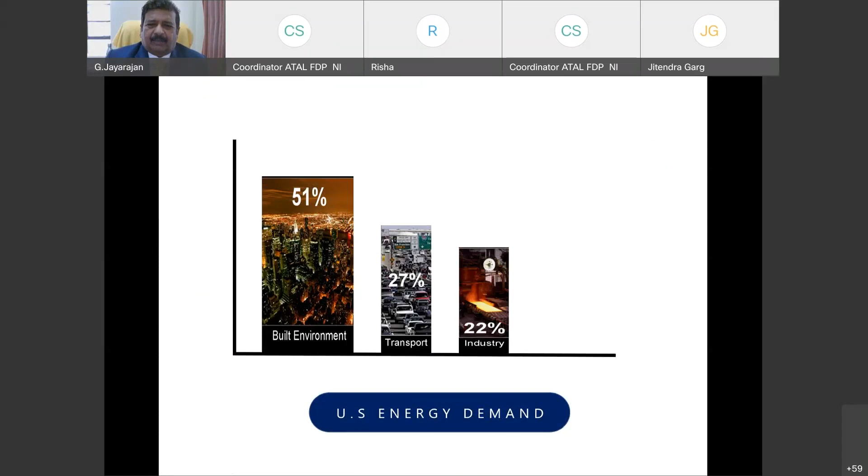Are coming up in the entire world. So the energy demand, the US energy demand, consumes 51% of built environment, and transportation 27%, and industry it's only 22%. Built environment is unavoidable, but we can reduce the consumption because most two-thirds of the life of our human beings are spent in the house only. So we need to curtail the built environment consumption. Then only we can able to reduce the carbon emission.

The problems, what are the problems available? Heat and cool, it is consuming 38%. Food and water 19%. Light 18%. Appliances 13%. Others 12%. These are all the problems we have to curtail.

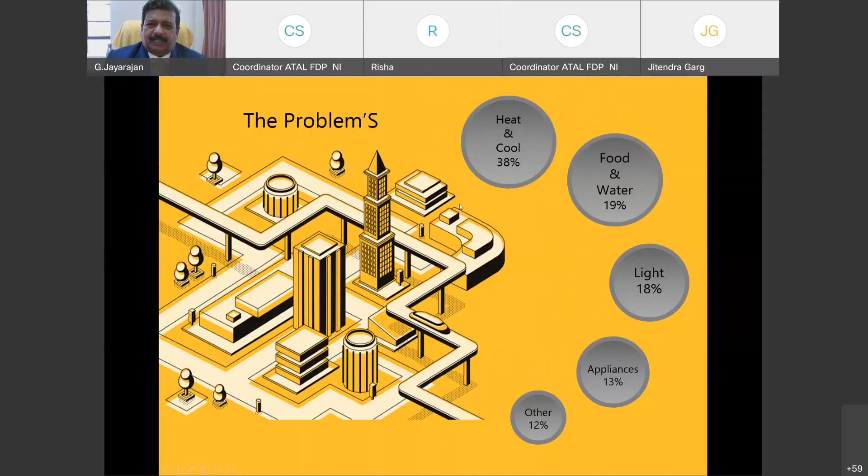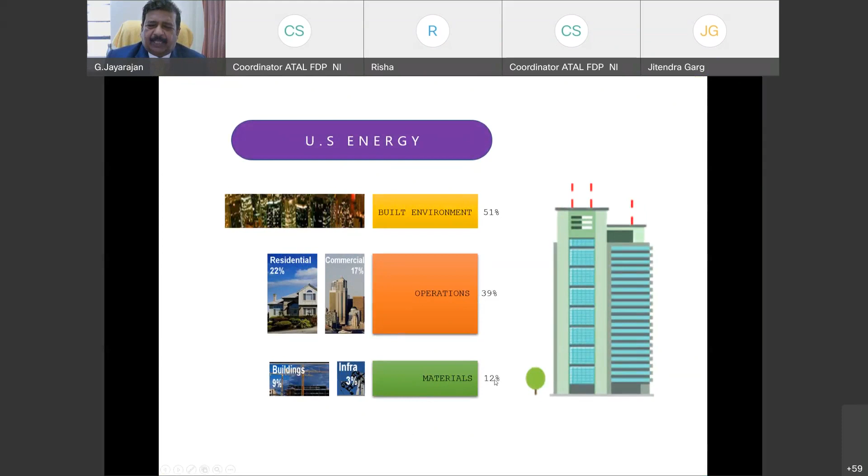US energy built environment 51%, residential 22, commercial 17. Operations also we need energy efficiency, energy required for operation 39%. Materials, for production of materials, we have to incur energy of 12%.

While launching the Green Building, US Green Building Council in November 2007 said the climate change is the single largest opportunity for this country since the mobilization of World War II. It was the slogan at the time for launching the USGBC.

As CO2 increases, what will happen? Billion tons of CO2 emissions, a billion tons per year, is emitted under various conditions. In the previous slides, we have seen the concentration also increases day by day. The red is the worst condition, and the yellow mark is what we can able to tolerate, but we cannot sustain that.

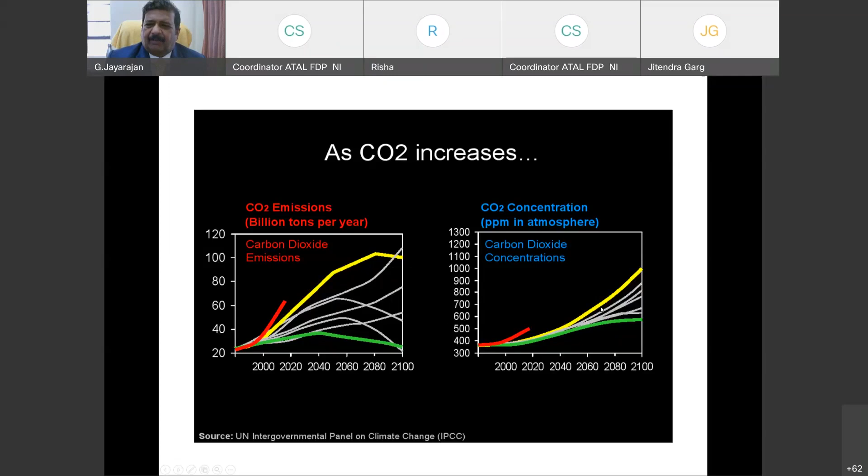Now we are at 385 parts per million. At the rate of 2.5 parts per million annually increasing carbon concentration, what will happen at the end of 2035? We will reach 450 ppm CO2. That will trigger potentially irreversible glacial melt and sea level rise out of humanity's control. It will go out of control if the same carbon emission is continued, increasing at the rate of 2.5 ppm annually. We will be meeting the 450 ppm at the year 2035 itself.

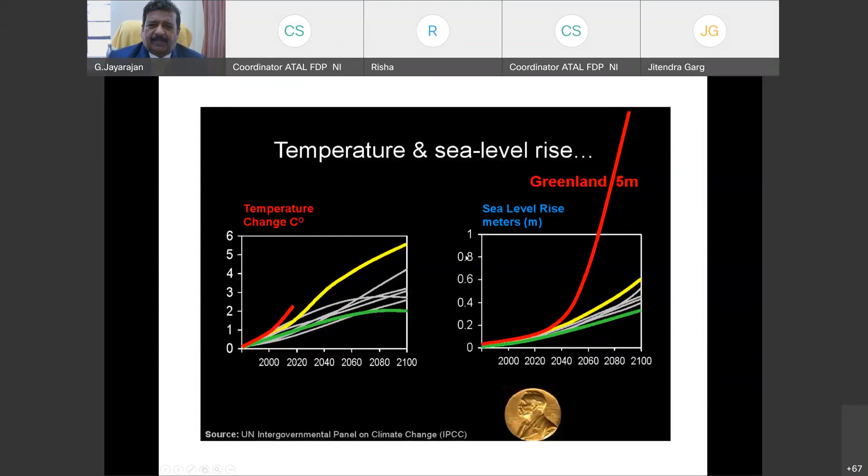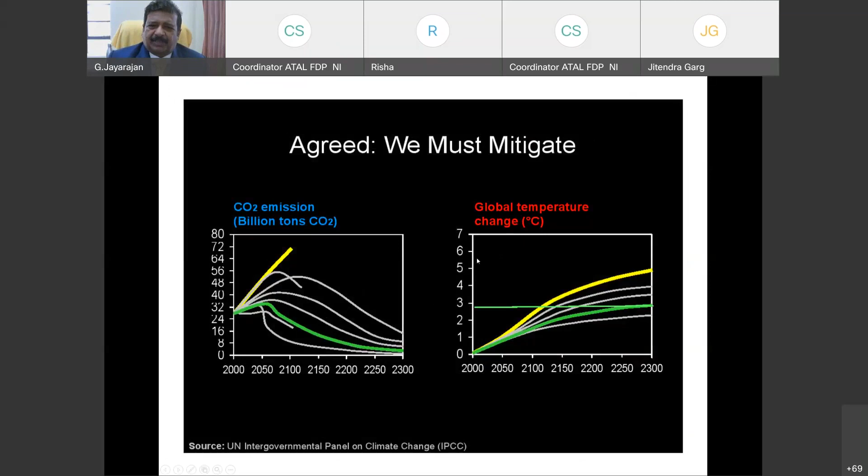Agreed, we must mitigate CO2 emission. We must reduce the carbon emission. Global temperature has to be controlled. Then only we can able to control the climate change.

The first country that will be entirely lost to rising sea levels is Kiribati. The low-lying Pacific nation of Kiribati is negotiating to buy land in Fiji, so it can relocate its islanders. This is the situation - if the sea water continuously rises, most of the land will go inside the sea. This is the challenge we are going to face by 2030.

Zero carbon neutral by 2030. We should all work together and reduce the carbon emission.

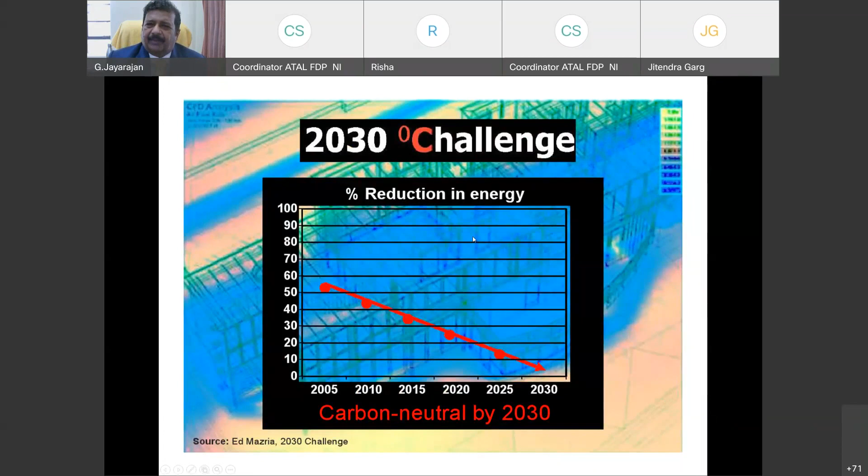What is green building? Green building is one which uses less water, optimizes natural resources, that is locally available material used for construction within 5 to 10 kilometers, and conserves natural resources. We should minimize the use of fossil fuels, coal and natural gas, since these are very limited sources available right now, so we have to carefully utilize natural resources and generate less waste.

97.5% of water is seawater surrounding the world, and only 2.5% is potable water. Of that, 30% is available in glaciers, and only 0.4% is available as surface water. So we need to be very careful in using surface water, treat it as a precious material, and be very cautious in handling water.

Healthier space for people as compared to conventional building. As I told you, 2/3 of our life is always spent in the house. So the working atmosphere in the house, the working space and moving space, should be very comfortable to the occupants and support their well-being.

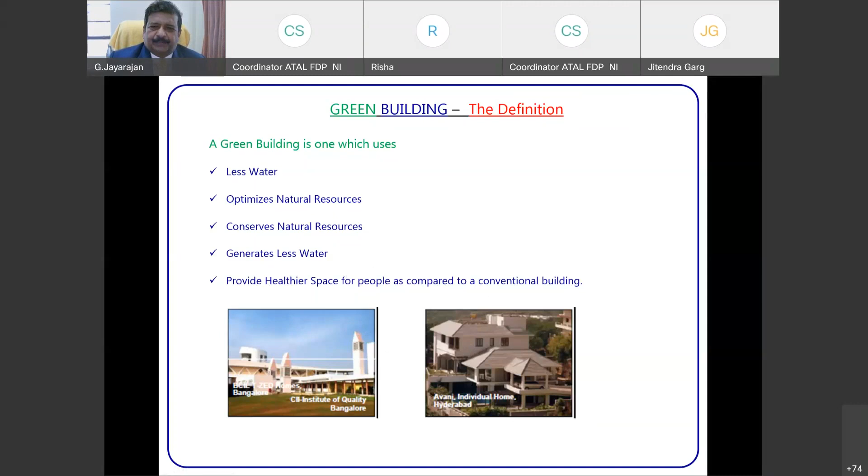When commencing in 2001, the first green building, about 20,000 square feet, was initially planned in Hyderabad. This is the first green building constructed at Hyderabad. Now more than 5,000 registered projects are available all over India, and 7 billion square feet is already constructed in India.

What is green? Energy efficiency, and recyclable products we are using.

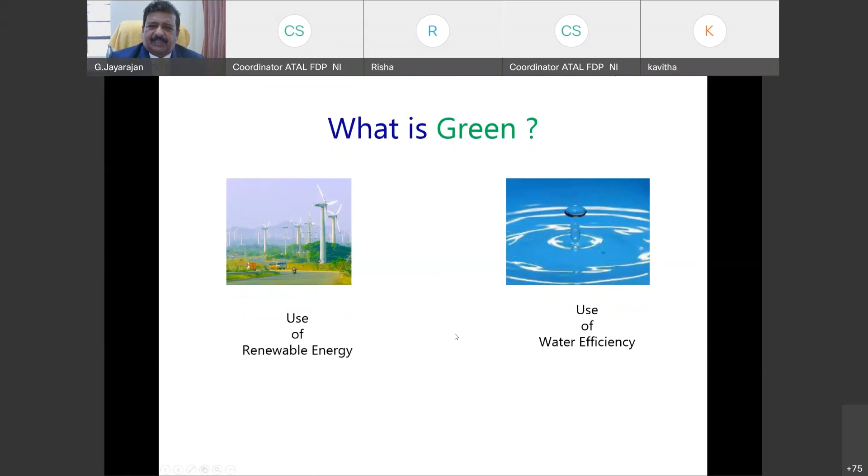What is green? These are all natural, renewable sources. We have wind sources, use of renewable energy, use of water efficiency. This leads to sustainable development. Harnessing solar energy, since India is a sun-dry area, we can use solar panels and utilize the opportunity of sunlight.

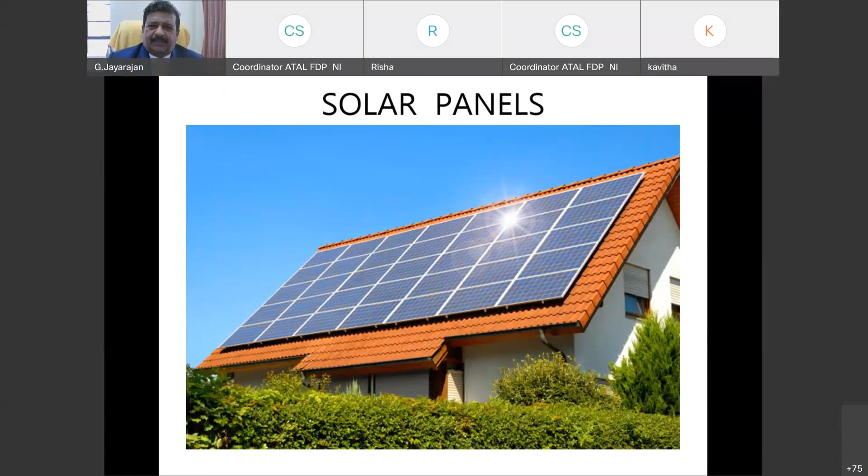Built environment, as we have seen earlier, contributes 51% of carbon dioxide emission. Built environment consumes 76% of the energy we produce. 31% of carbon dioxide from residential buildings comes from operation. 75% of residential emission is in operation and maintenance, and only 25% is from materials during construction.

Carbon credits and building designs help sustain the environment. Engineers have a 90% role in sustaining this.

Green buildings relate to carbon emission and energy consumption. Carbon emission comes from the following actions: burning of waste, coal-fired power, DG power, material manufacturing, burnt clay bricks, appliances like geysers, TVs, gas stoves, computers, air conditioning, refrigeration, and waste management including garbage, sewage, and water recycling.

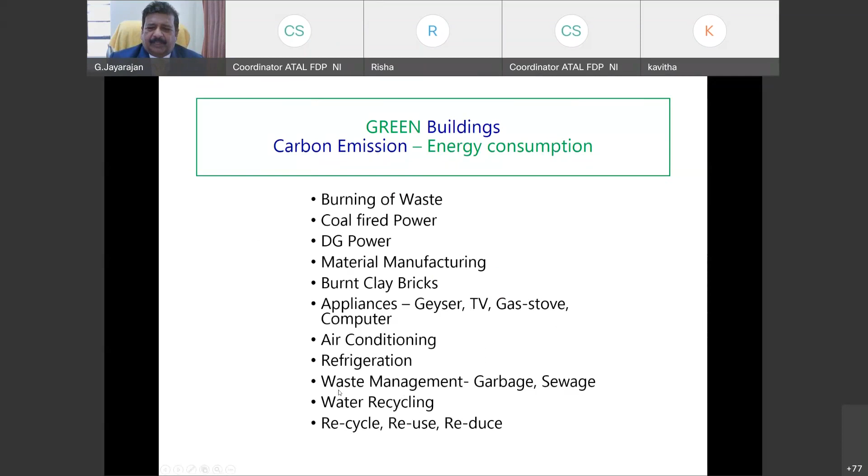In the consumption of water, we should think about recycling, reusing, and reducing the consumption of water. Civil engineers are most commonly involved in this.

We are more concerned about the strength of the building, but the architect designs the structure in such a way that they incorporate green building concepts, using double-glazed glasses that reflect heat while sunlight comes inside the building.

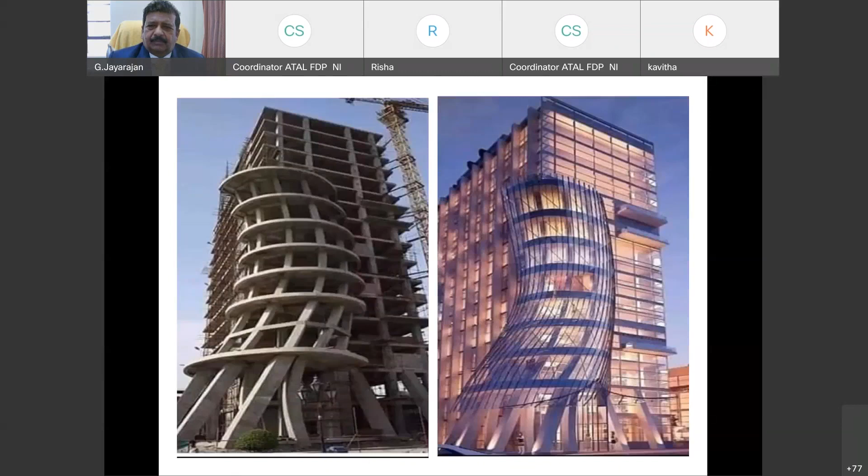Materials we use for green building versus conventional ones should be recyclable, reusable, and reduced. We should be very careful in using the materials.

Standby mode consumes 150 million watts every day. We are not switching off the computer while we are not using it, but the standby mode alone consumes 150 million watts every day.

Solar, wind, tidal, and wave energy are all zero carbon emission sources. They do not emit any carbon, but we should go for these alternative methods. We should recycle trash and wastewater. Indian culture is sustainable, so we should reduce or say no to non-veg, use laundromats, solar heating, energy efficient appliances, and lighting.

For lighting, we should go for LED and CFL bulbs instead of incandescent bulbs.

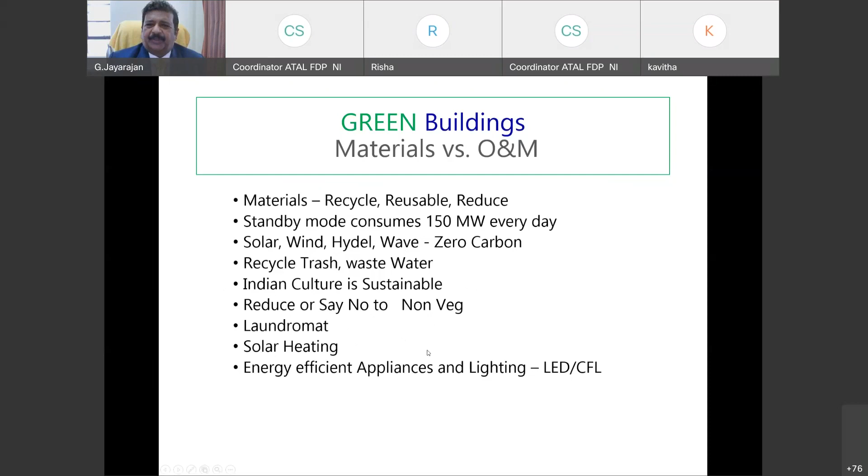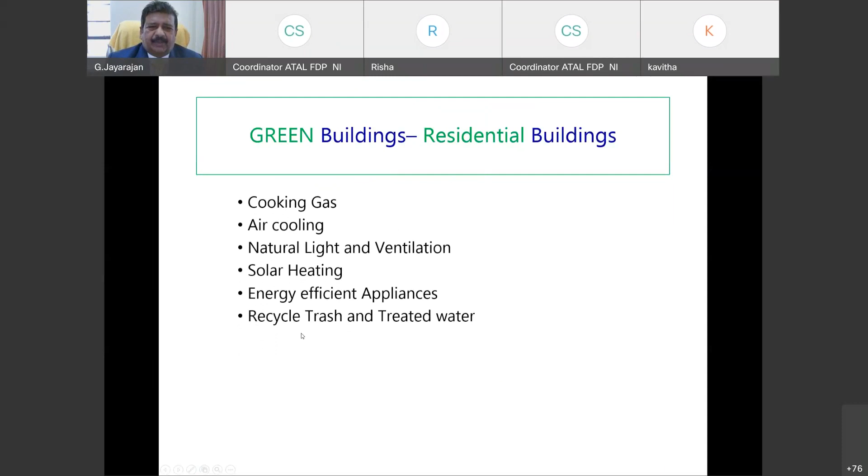Carbon emission from residential buildings comes from cooking gas, air cooling, natural light and ventilation, solar heating, and energy efficient appliances. We should recycle trash and treated water, reusing it, and also recycle and reuse materials.

For simple living, we should go by walking or cycling for small distances, and select our working space adjacent to our living area so that we can save on transportation costs.

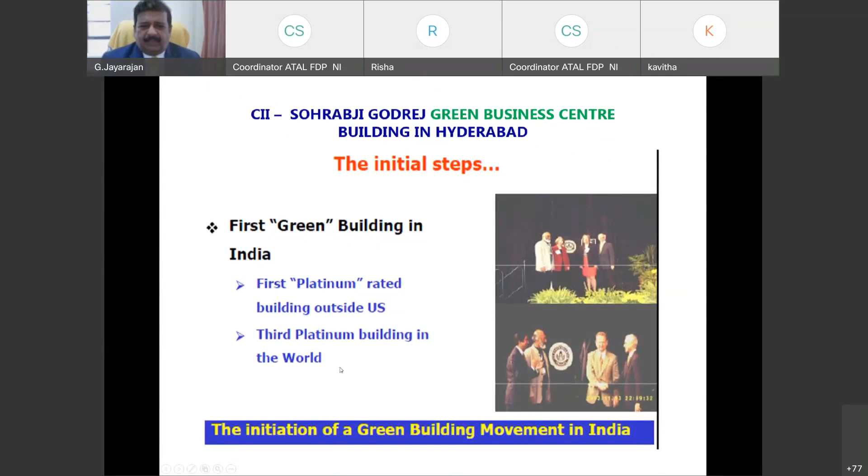These are the definitions given by the Green Building Council. Initial steps: the first green building in India is the platinum rated green building outside the US, which is the Sohrabji Godrej building.

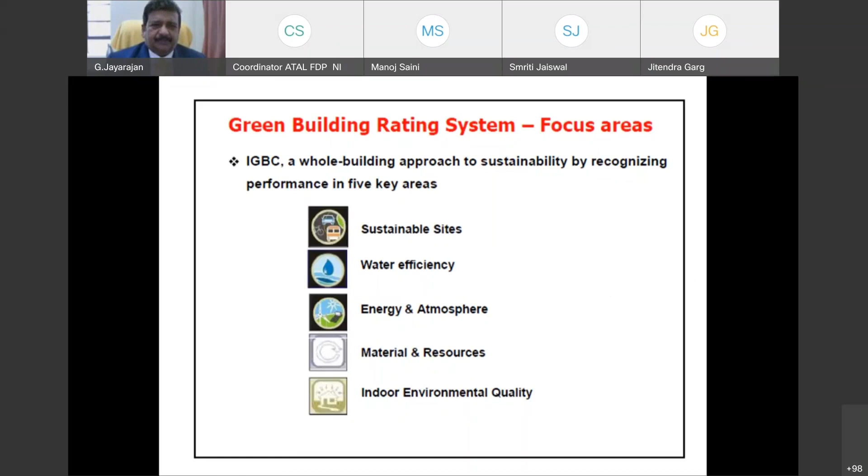Rainwater harvesting. We have now started doing rainwater harvesting all over India.

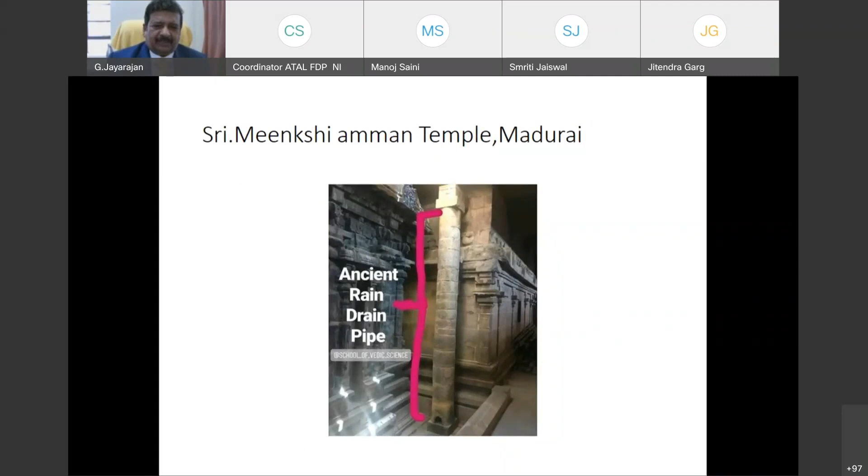This is Meenakshi Amman Temple, Madurai, constructed 1000 years back. We had the knowledge of conserving rainwater from the rooftop. In the temple it is available right now, along with the ancient rainwater drain pipe which stored this rainwater.

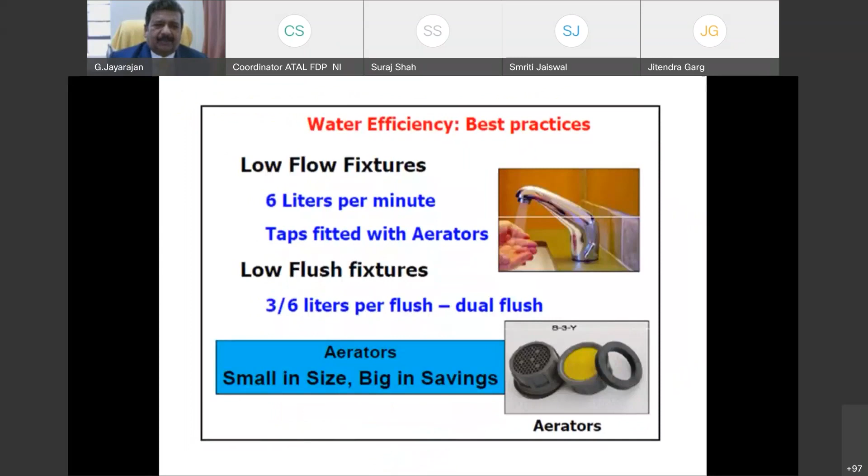Water efficiency: low flow fixtures are available in the market now, 6 liters per minute taps fitted with aerators, and low flush fixtures with dual flush using 3 to 6 liters per flush. Small in size but big in savings of water. These low flow fixtures are available in the market but slightly costly. Still, we have to install them in green buildings.

Material resources are the main concern. We have to select good material. Recycled construction and demolition waste can be utilized in new buildings. Recycled content and regionally manufactured, locally available materials can be utilized for construction. Certified wood, certified by the forest department, can also be used for construction.

As I said earlier, indoor air quality depends on the volatile organic compounds usually used in walls and floorings, polishing, adhesives, and sealants. We should check for low volatile organic compound trademarks for paint and other applications we select.

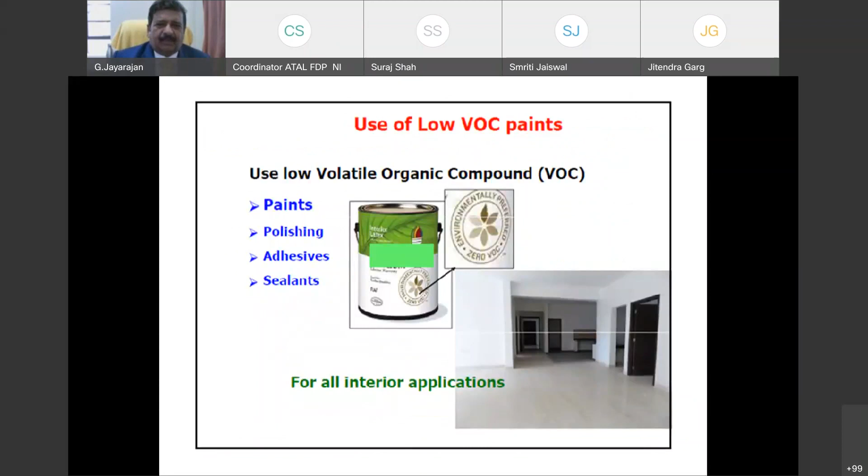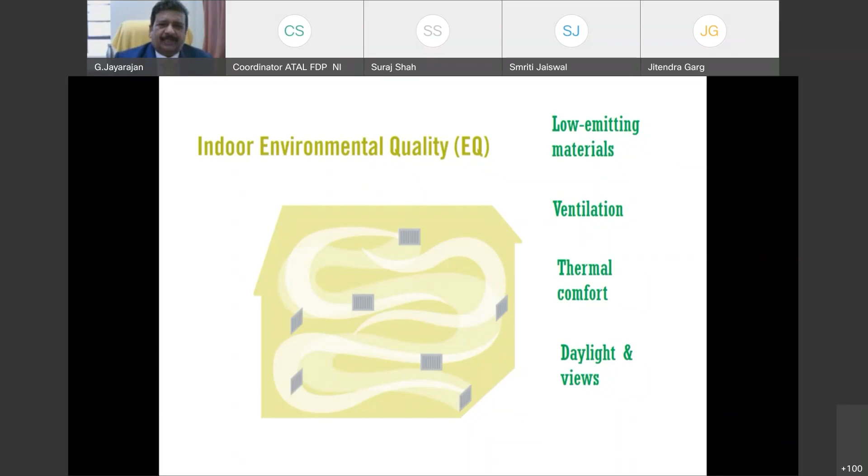Indoor environmental quality covers low emitting materials, which should emit low volatile compounds. Ventilation should be there, otherwise dampness will be created indoors and will spoil the health of occupants. Thermal comfort, daylight, and views should be maintained, with the main hall and other areas kept lit at least 8 hours a day. Ventilation should be there, and daylight should come inside the building.

Causes of poor indoor air quality include poor ventilation, outdoor air quality impurities, poorly insulated building envelopes, smoking, use of toxic building materials, high volatile compound based paints for walls, dampness and water intrusion which severely damages walls, use of volatile based cleaning agents, poor lighting, poor furniture, floor coverings and carpeting, poor pollution control during construction, damaging existing vegetation and trees, poor site planning and management, and use of pesticides, all of which should be avoided.

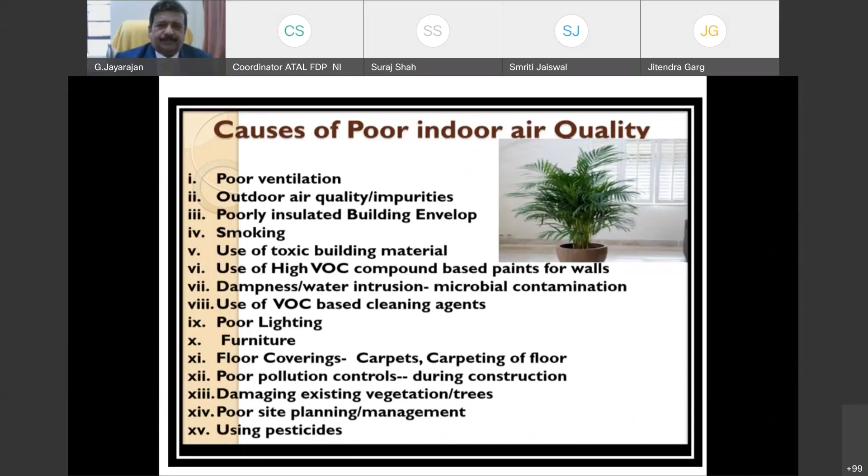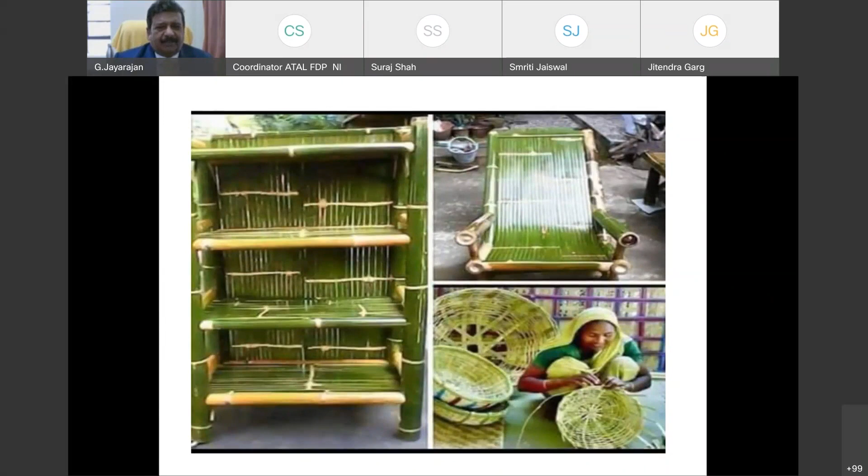Now we should use bamboo. Bamboo has a very good tensile stress property, so right now it's used in small construction. We have tried bamboo construction in buildings too, for small slabs and other elements. They have started using it, and it is available online as well.

For small distances, you should choose to walk. We should also practice cycling.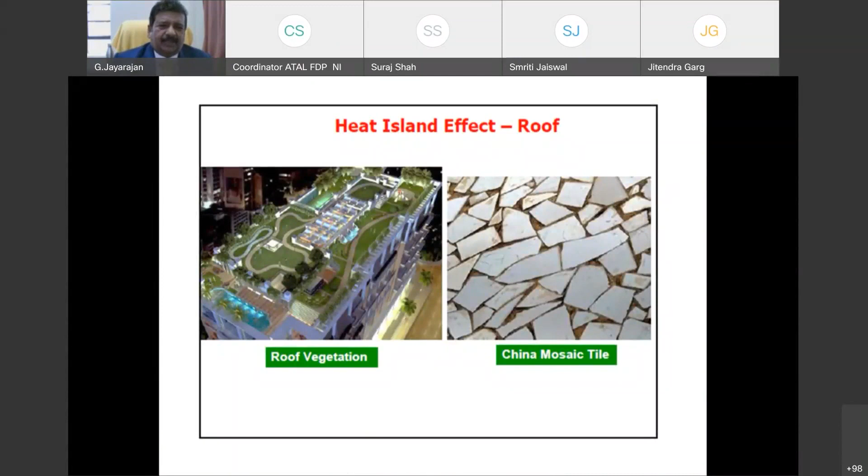This is the heat island effect and roof vegetation. We have to reduce carbon emission and heat radiated from the building. Roof vegetation is the best idea. We should keep roof vegetation, and China mosaic tiles or broken tiles should be used in the pavement, which also reduces the cost of construction.

Vermicomposting: kitchen waste should be segregated, and we can produce natural gas and prepare very good manure for indoor plants and rooftop gardens.

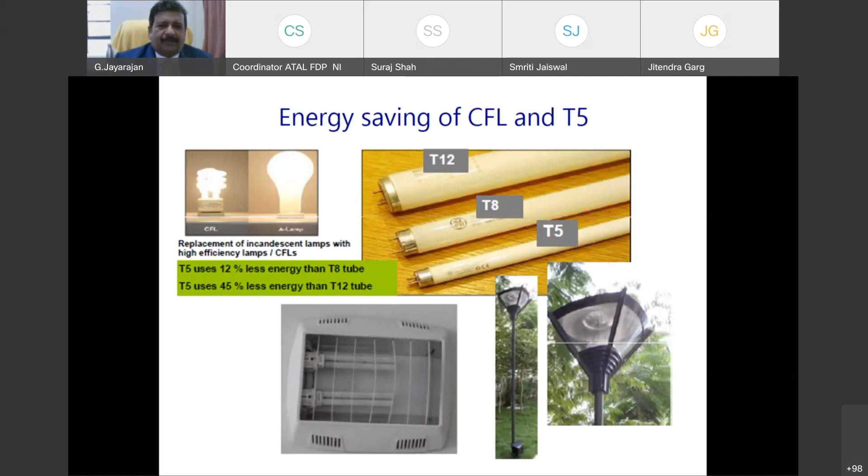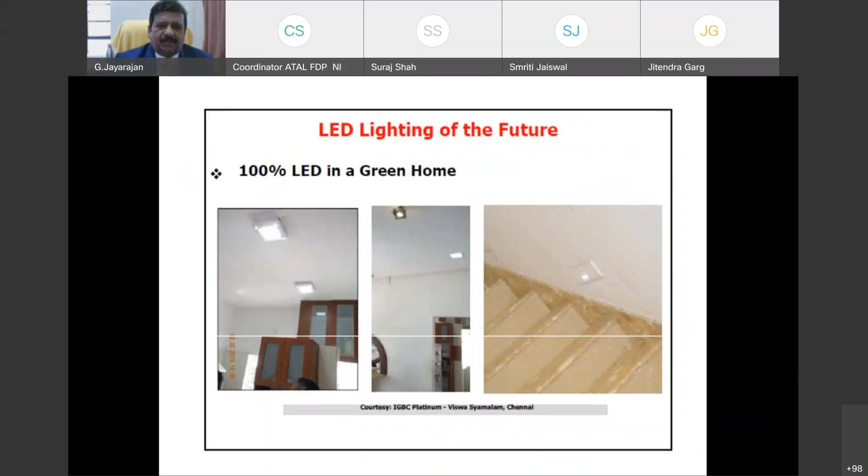LED lighting for the future: 100% LED should be utilized in green homes. Star rated equipment should be used throughout buildings, at least 3-star rated equipment should be utilized.

Cross ventilation is an important concept we should adopt. All rooms should have at least 3 openings to ensure good air quality. A room with only two entrances, or 1 or 2 ways, should be avoided; we should provide at least one more window so that we can have cross ventilation in all rooms.

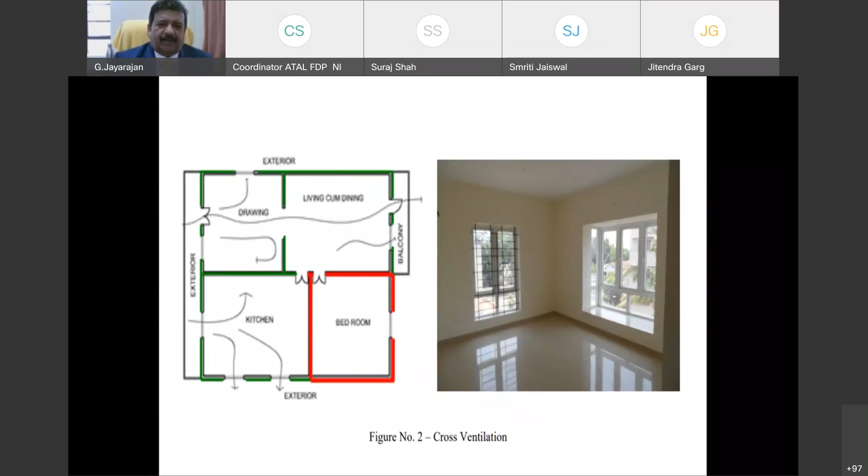These are all simple things, but we need to adopt them in green buildings. Then only we can save energy and water, and ensure the well-being of the occupants.

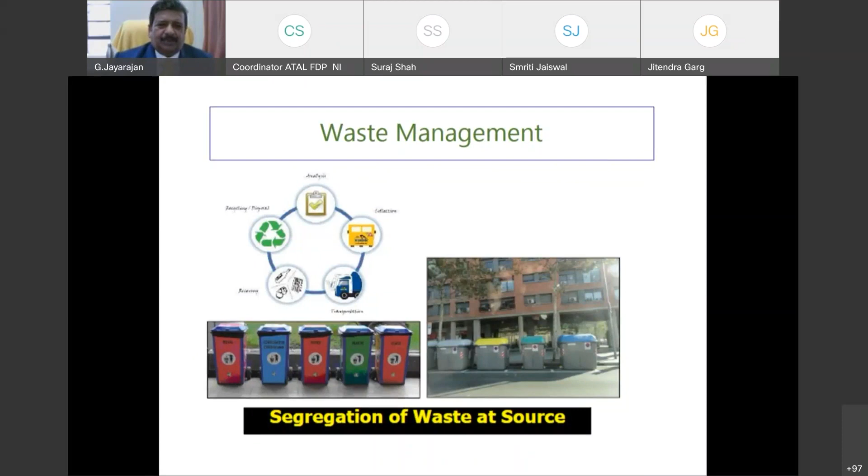Waste management: it has to be segregated at source itself - green waste, dry waste, e-waste - and segregated by corporation municipal authorities. We should help the municipal authorities in transporting waste materials to the landfill, and segregate at the source. These are all construction materials; we can classify and reuse them again. You should not throw them away.

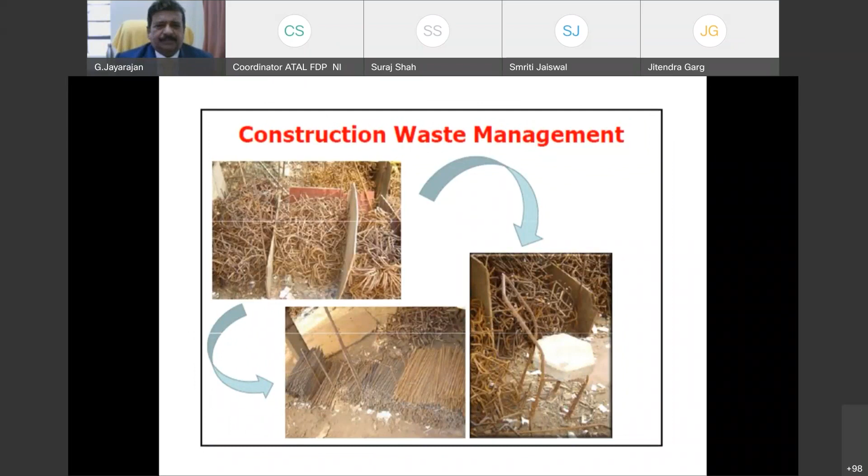We can monitor the revenue generated from the sale of recyclable waste also. Small bottles, small size items, and other things we can also reuse.

Materials with recycled content: aluminum frame, cement, fly ash bricks, glass, steel, tiles, gypsum, ceiling, MDF. These can all be recycled and cannot be thrown away.

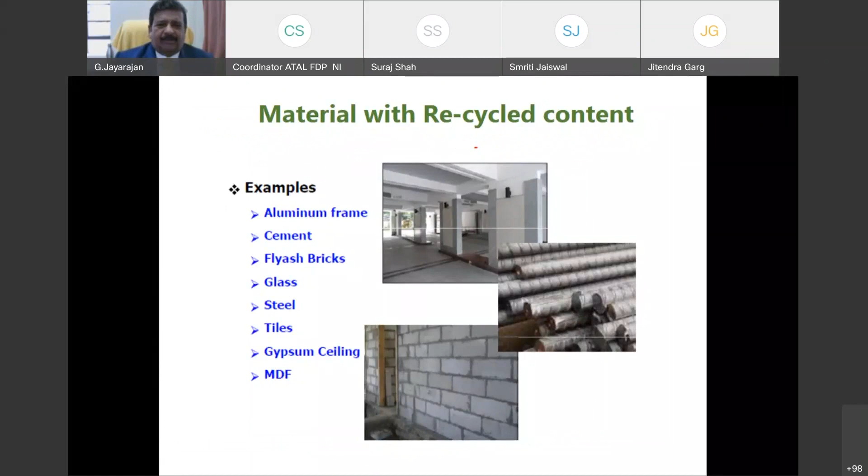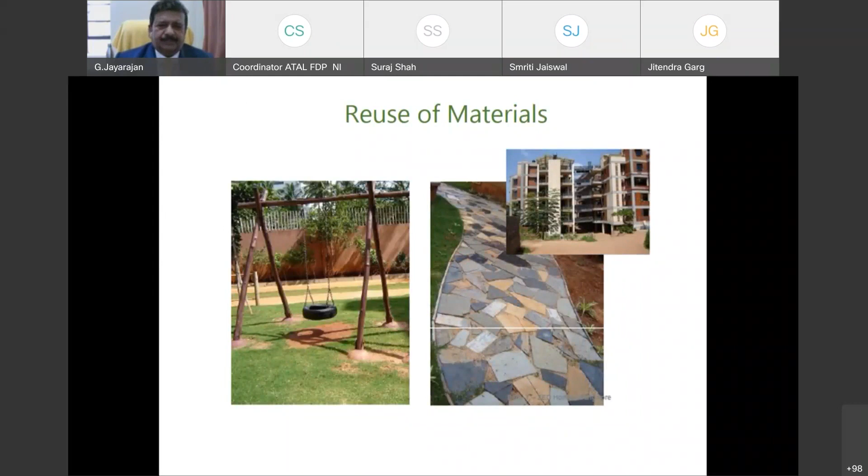Reuse of materials: we can use tile and China mosaic tiles and other broken tiles for pavements and other things. That way we can reduce the cost of construction using salvage materials, which we can reuse again for any purpose.

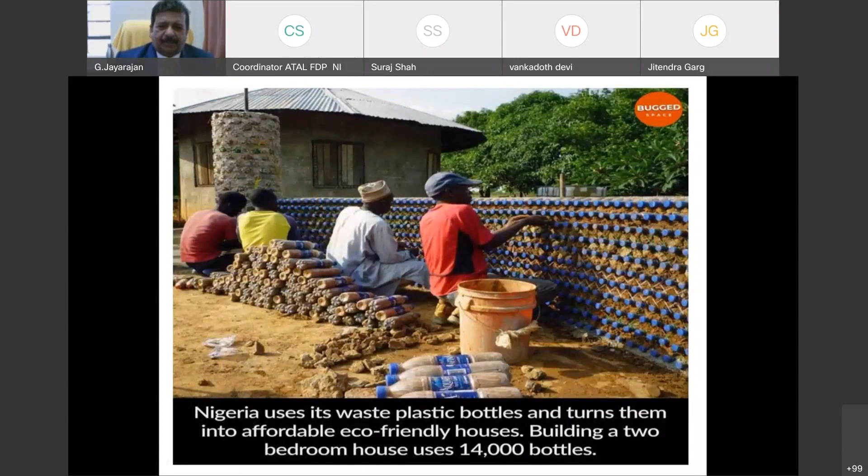Nigeria uses waste plastic bottles - these are all innovative ideas. We should avoid wasting material and go for new ideas.

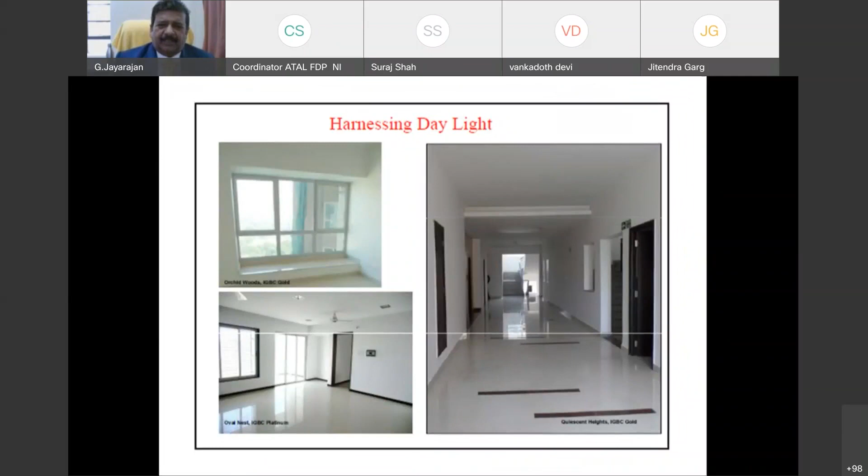Harnessing daylight: for at least 8 to 10 hours, we should harness sunlight inside our building. Then only the occupant will feel comfortable enough.

Concept of sun pipe: these are now being implemented in new green buildings. Sun pipes are available without any heat transfer - we can transfer light without heat.

The view from the exterior to the interior will be only this much. Heat will not come through. Next, you can see it, madam.

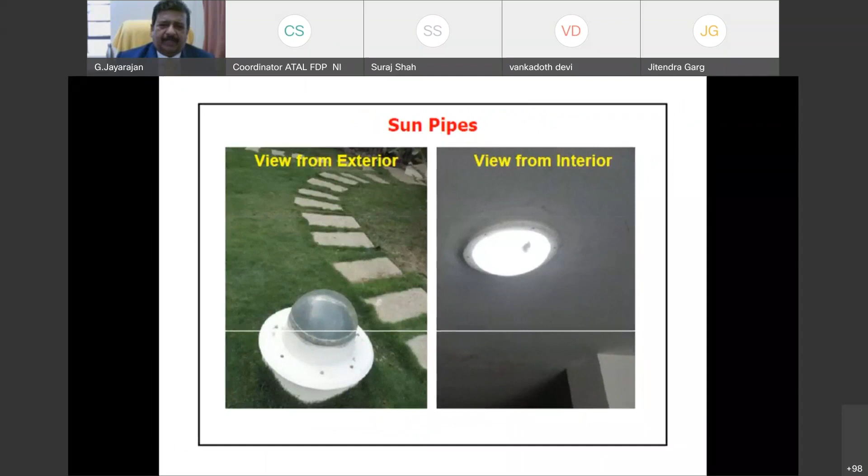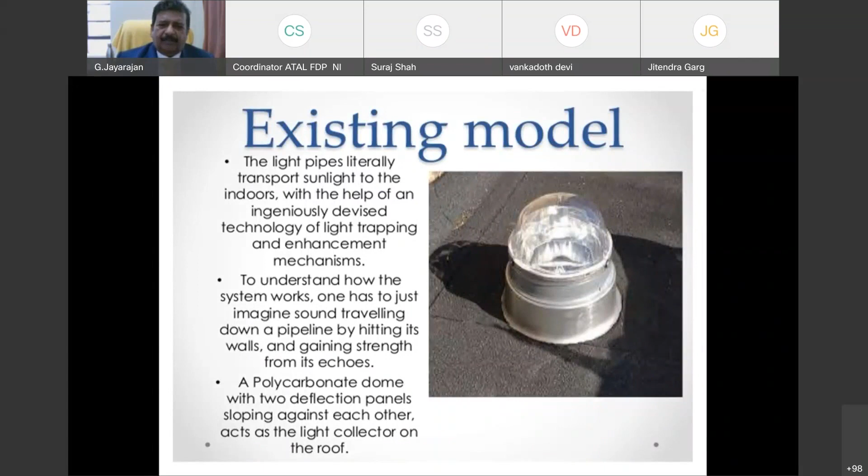The polycarbonate dome with two deflection panels sloping against each other will reflect the sunlight and transmit it to the floors.

This is the concept - even at midday, you will not feel any heat here. While reflecting, the heat will all dissipate, and only light will be transferred to the indoor space.

Again, the same concept - light pipes only.

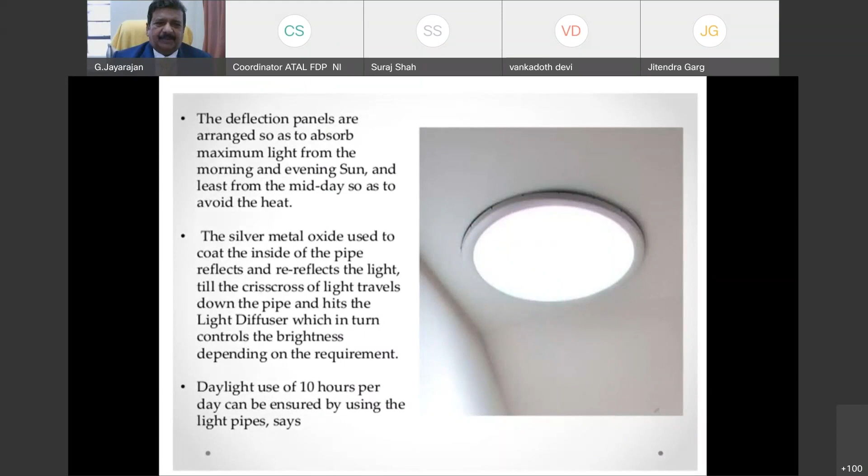Office fitted and filled with sunlight - we can achieve zero electricity usage in this office. These cables are not required for much lighting, but we can still have a sun pipe like this with natural sunlight. We can save energy.

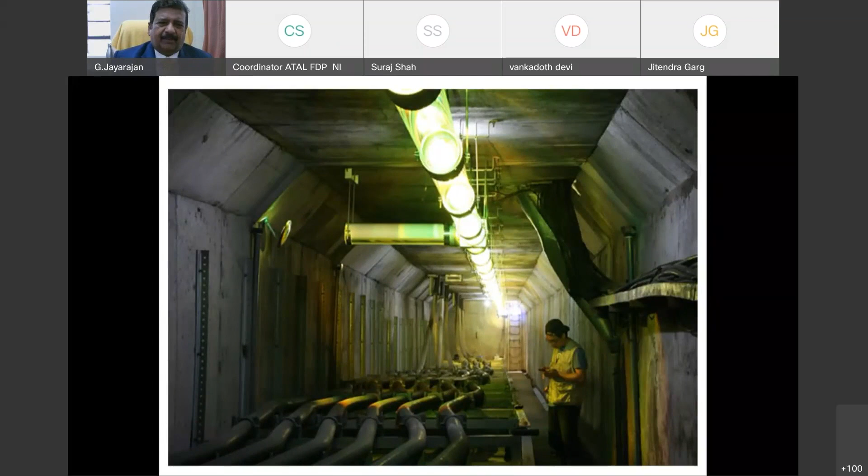These are all positions of the light pipes.

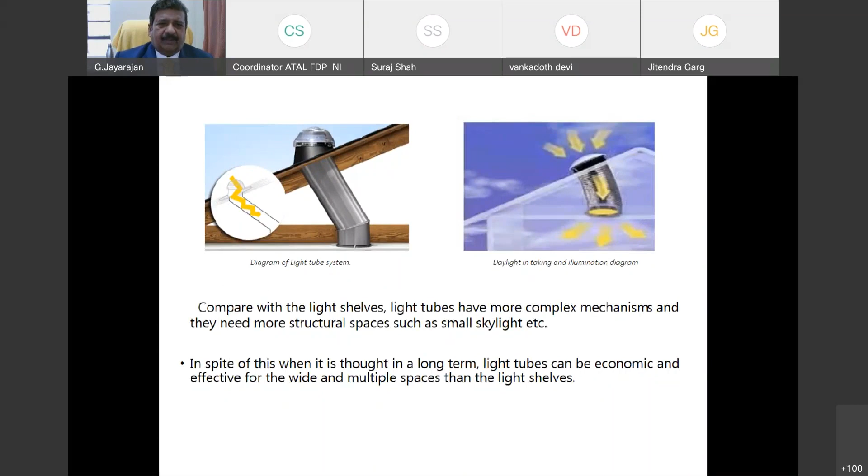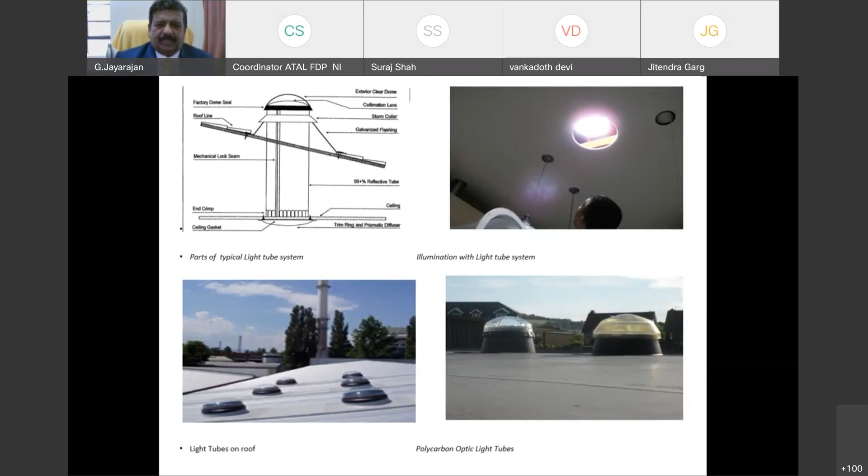It's about 10 to 15,000 only in cost, madam. We can install it in any factory building.

Sustainability: even in the selection of the site itself, we should not disturb the locally available environment. Outdoor microclimate, stormwater management, erosion control, ecosystem, alternative transportation - the building should be located within 800 meters from the main community area.

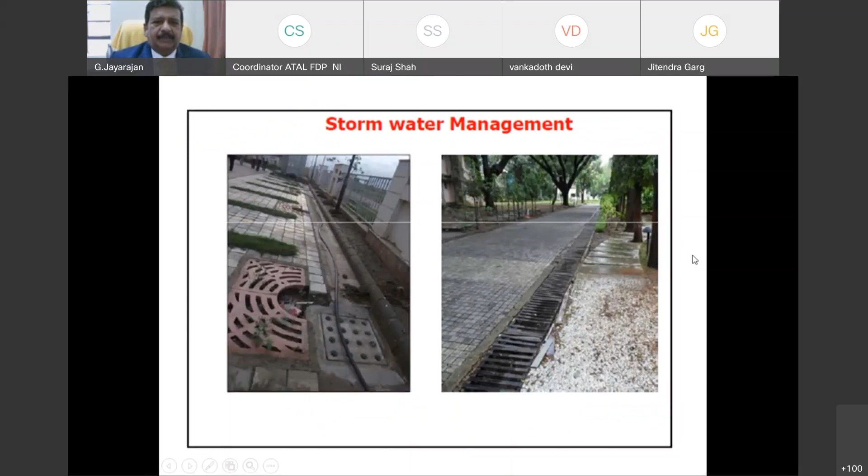Yes, madam. Next, madam. Next, madam. Madam, next. Madam, next.

Sir, I have native plant species - is there a slide, present slide. Hello sir, madam next, madam. Still next? Next madam, next slide madam. Yeah, making sir - this one?

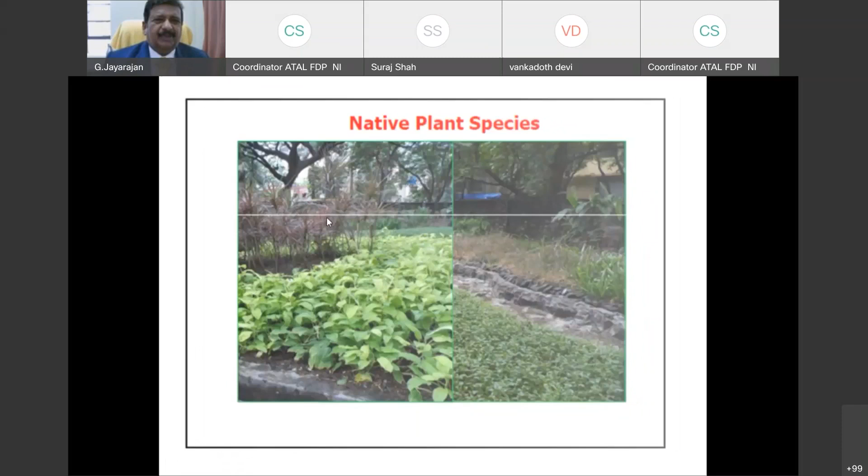In the late 80s, NASA studied these plants, finding them all-rounders for air filtering.

What is green building? Rainwater harvesting - we have already been taught this more than 1,000 years back. We have practiced it.

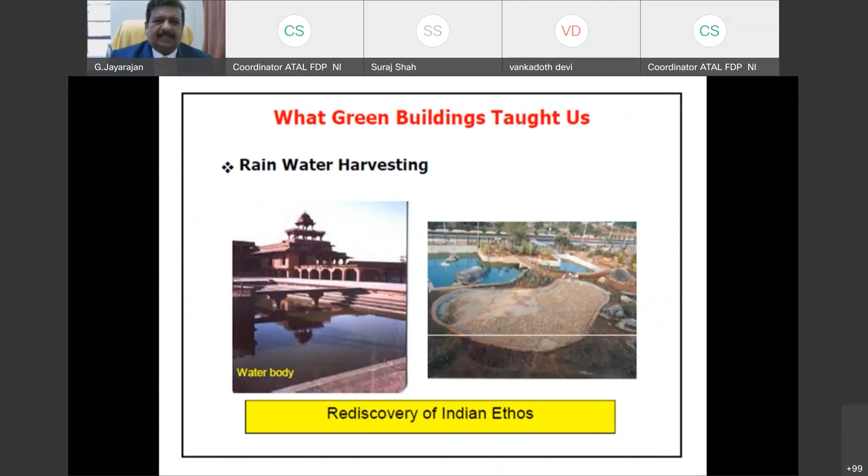Next one. Next madam.

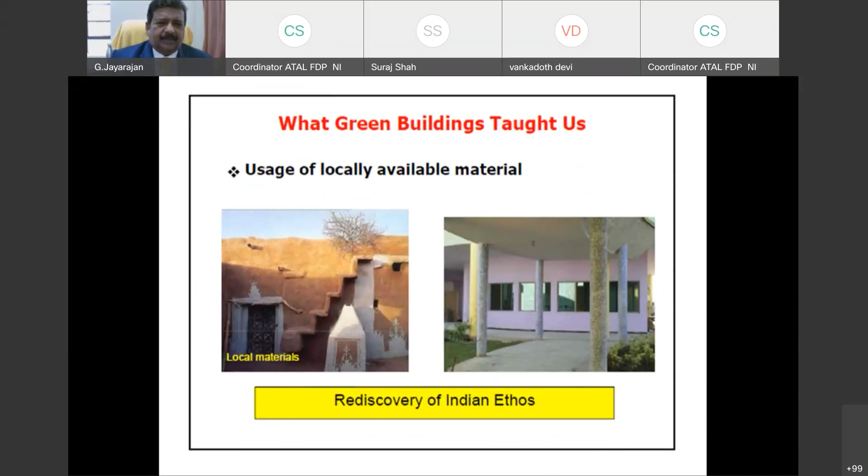Usage of locally available material: these are all stone columns, utilized for the construction of the building. These are mud flooring, mud roof - we used it here.

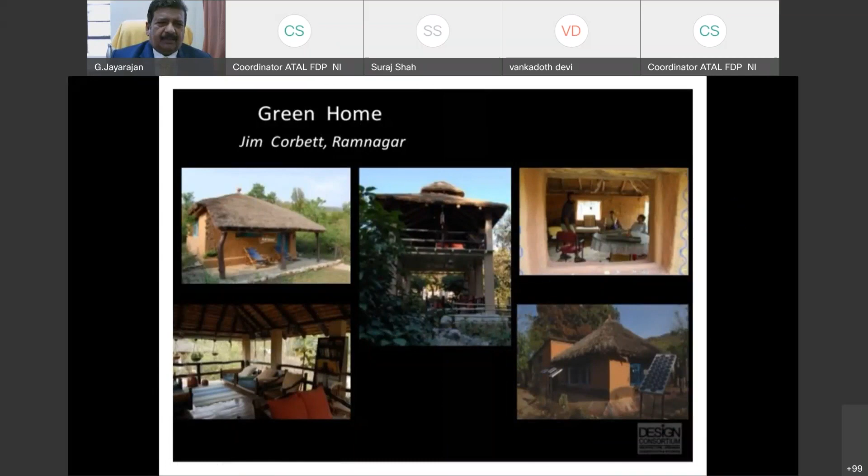These are all in Ramnagar, created and designed in such a way that they used locally available material - these are all mud walls, using small, locally available materials for construction.

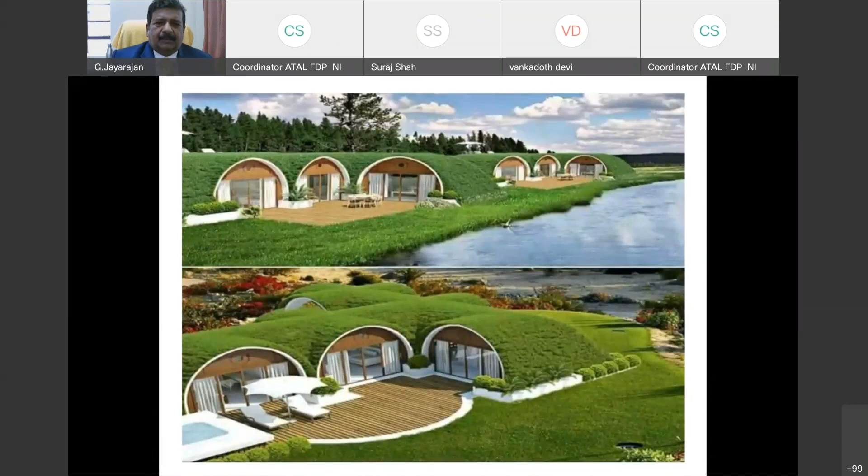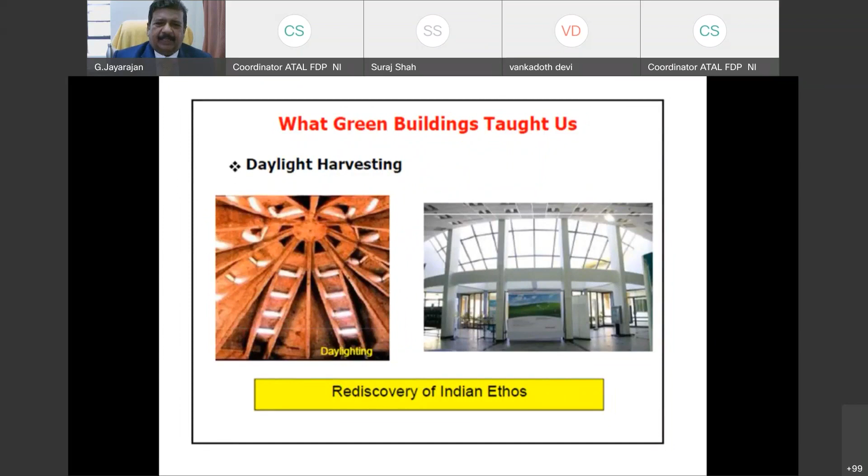Daylight harvesting. This is now practiced using indoor domes, and we harness daylight for up to 8 to 10 hours in the daytime.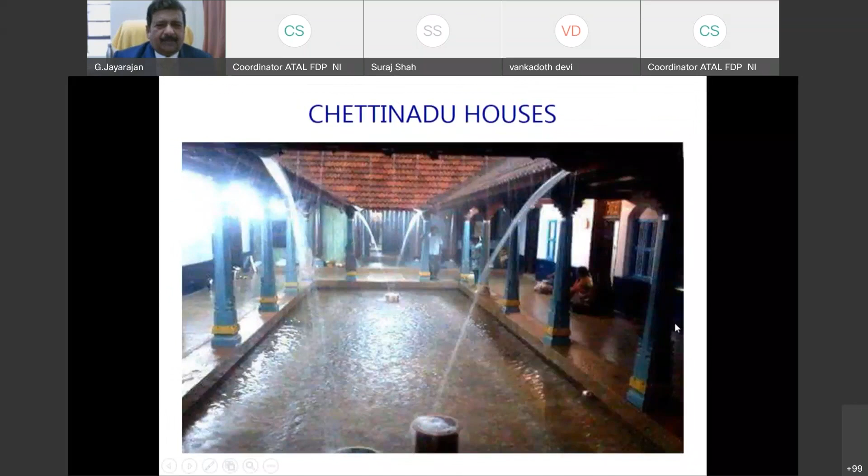Terrace landscape should also be designed like this with water elements, and a swimming pool can be considered on the terrace. This is the Chettinadu houses available right now in Karaikudi, Tamil Nadu. The water collected in the center of the building creates a pleasant atmosphere for the occupants. These are all Karaikudi houses, and it has 1,000 windows.

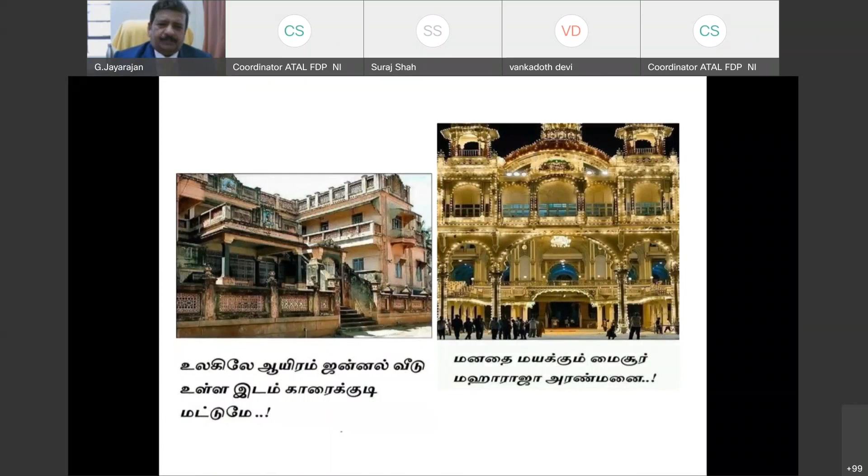These are all Mysore Palace. It is also a very ventilated and nice building.

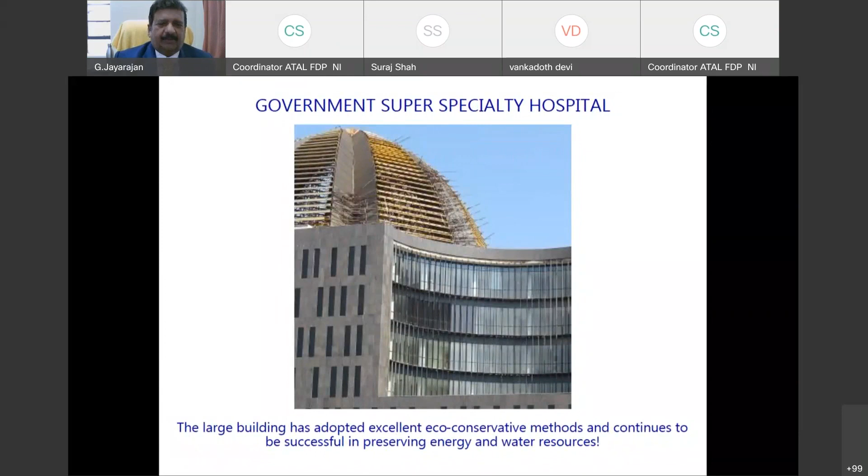This is the new secretariat building, now a super specialty hospital. It is also one of the green building concepts. Green buildings also consume 20 to 30% less energy than conventional buildings.

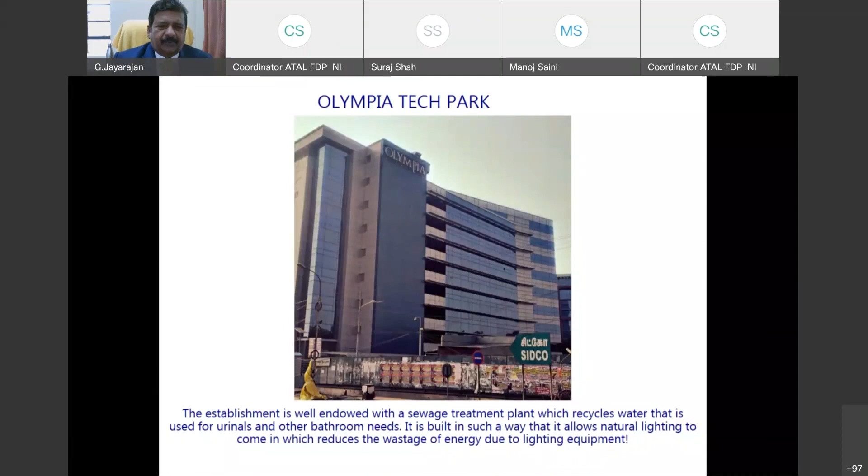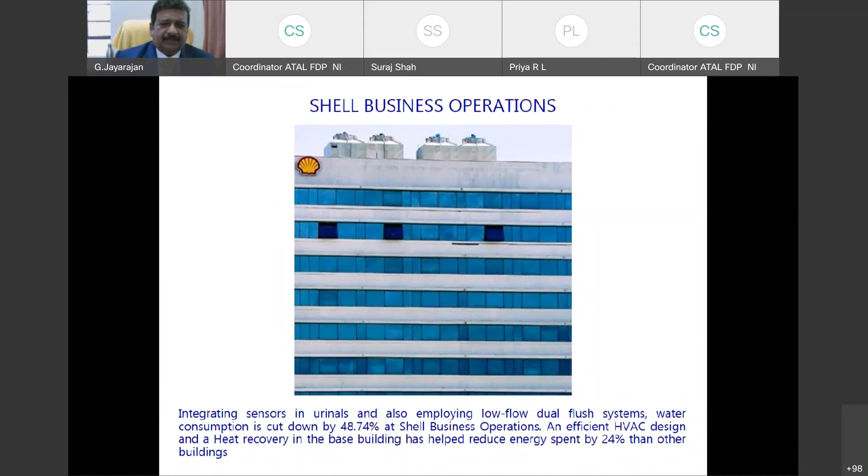Now all the countries are switching over to renewables.

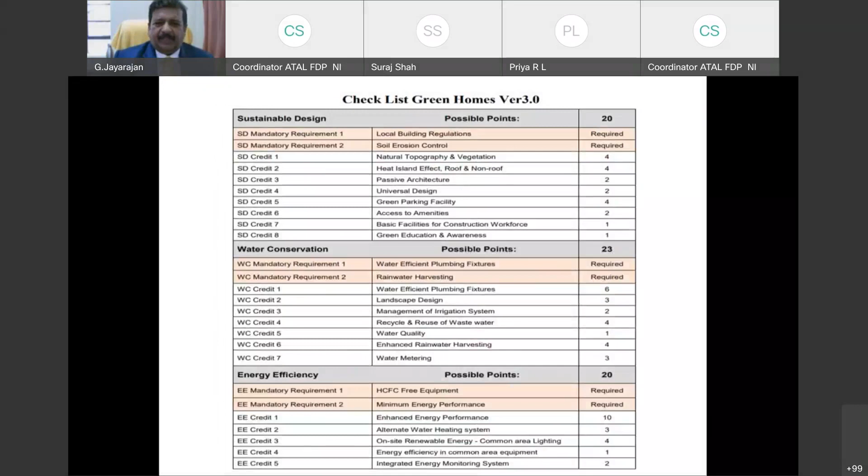These are the checklist items for green homes — the mandatory requirements and the credits. These are all the credit points with possible points: sustainable design is given 20 points, water conservation is given 23 points. These are mandatory requirements that won't be given points, but natural topography and vegetation will be given some points. Adding up the checklist comes to about 100 total.

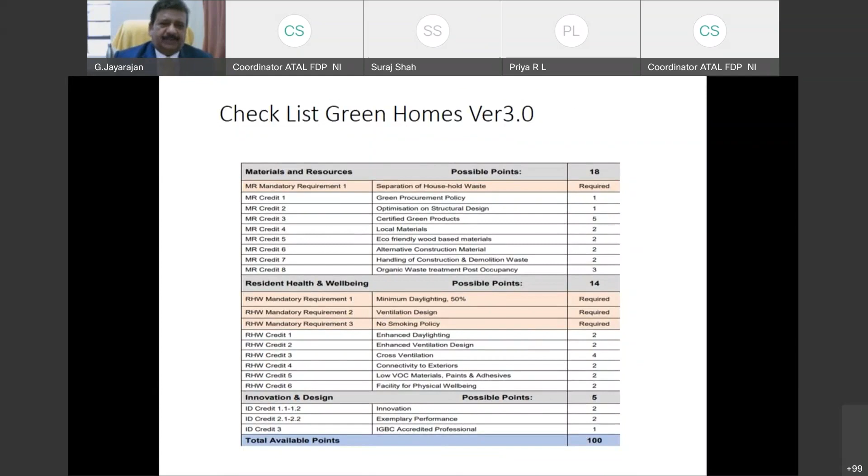Out of 100 points, the Accredited Professional will inspect the site and submit the assessment to IGBC, and based on the Accredited Professional's certificate, IGBC will come and inspect the building and give certification.

The entire requirement of hot water shall be met by solar energy.

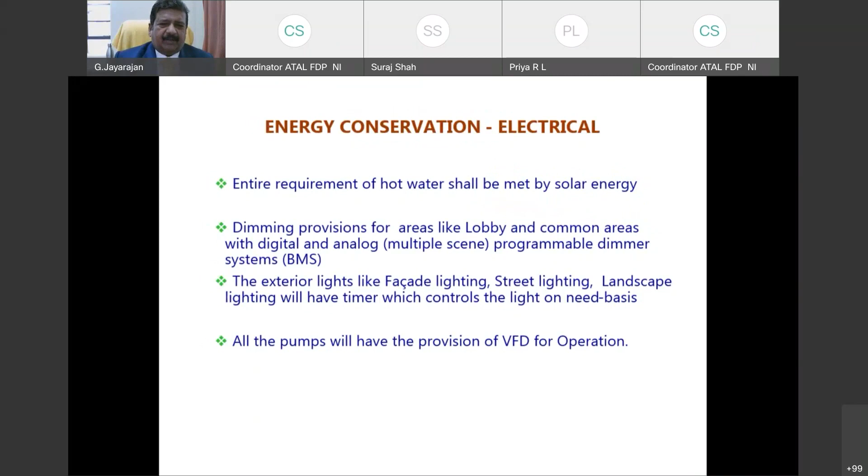Dimming provisions are provided for the lobby and common areas with digital analog and multiple scene programmable dimmer systems. Exterior lights like facade lighting, street lighting, and landscape lighting will have timer controls which operate the lights on a need basis. All pumps will have VFD operation.

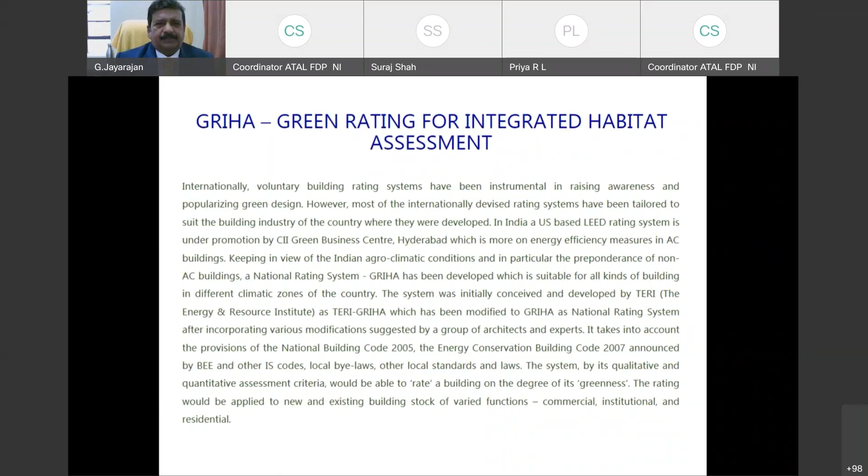Yes. Yes, ma'am. Yes, madam, these are all points given for the credits.

Everywhere there is a mandatory requirement, and after that extra additional points will be given as marks.

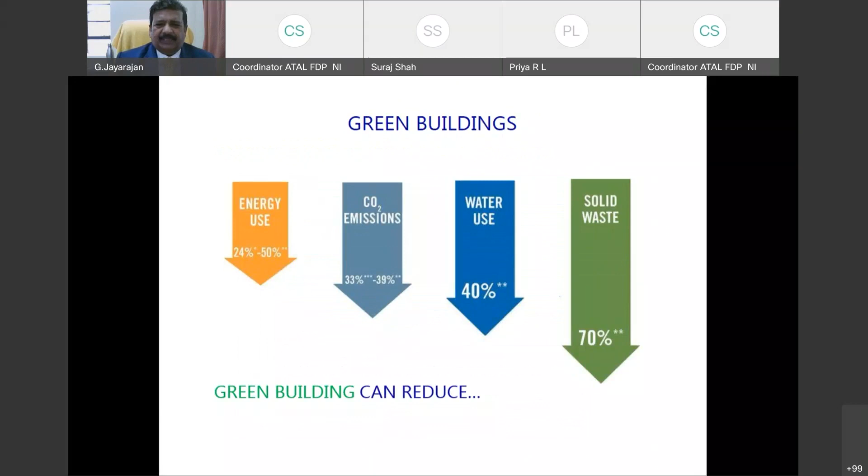At the end, for building energy consumption, we can save energy up to 24 to 50%. Carbon emissions can be reduced by up to 33 to 39%. Water usage can be reduced up to 40% and solid waste up to 70%. Green building can reduce all these in one shot.

Finally, a green building makes you happy, healthy, and more productive. It provides the highest quality of indoor environment, optimizes resources, reduces wastage, reduces carbon footprint, and makes building operation cost-effective and energy efficient, creating a win-win situation for the owner, occupants, and tenants.

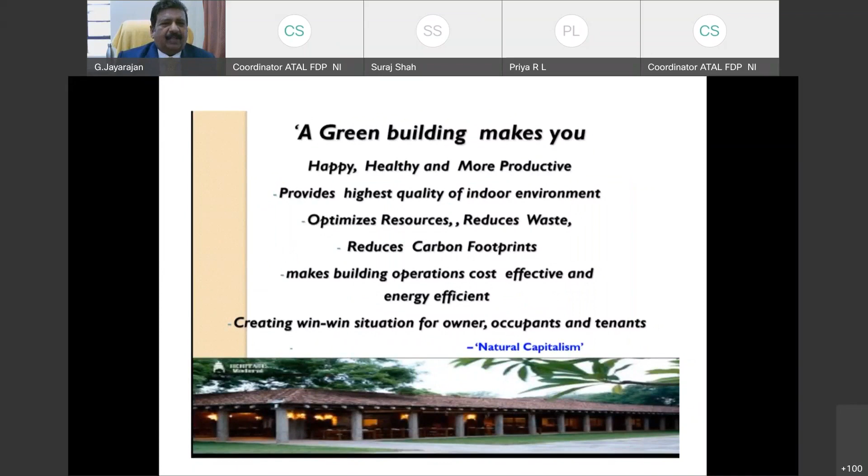Natural Capitalism. Thank you.

It makes economic sense, it makes sense for our planet, and it makes sense for our future. Thank you. Go green.